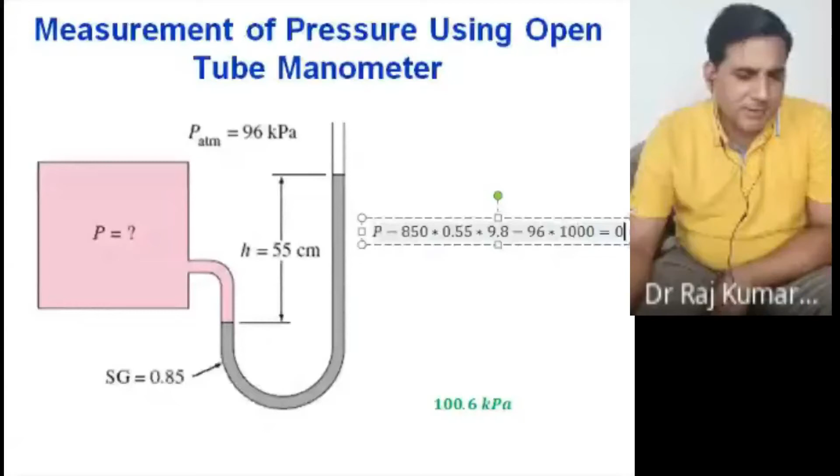So in last class we were solving something about manometer sensitivity. We talked about how the sensitivity of this manometer can be increased, in case of a small variation. So somehow you change the density of the fluid, or the design of the manometer, or some other means, so that you can measure that small delta H accurately.

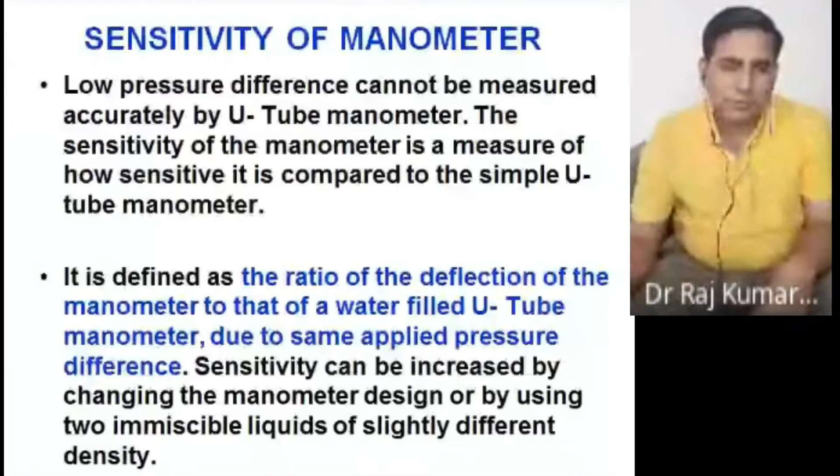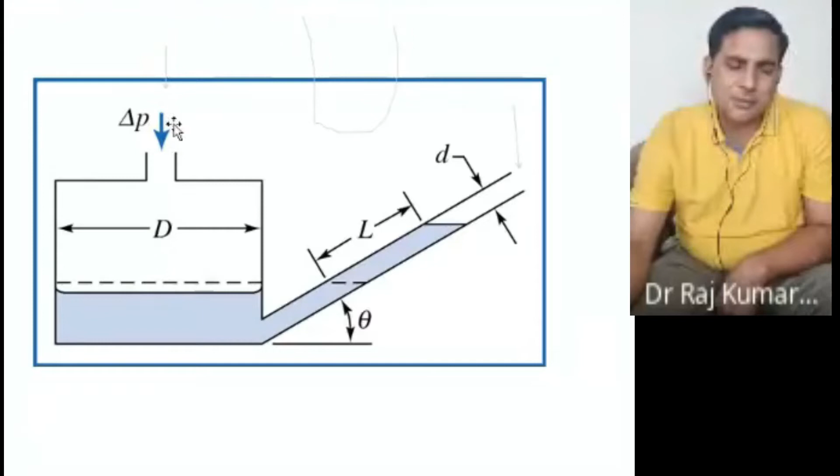What is the purpose of that? Once you connect these two ends into the manometer, you can see the difference. The primary level of the fluid in this particular limb was just at this point. Once you connect these two ends to a particular pipeline, you see the difference here - the meniscus has just a vertical change, this much. This you cannot measure by a simple U-tube manometer because it's of the order of just 1 millimeter.

This is just the order of a millimeter, so you cannot measure it much more precisely. But see the change on this side - can you see the change here? For this much of 1 millimeter vertical change, the inclined change is this much, much larger. So you can measure it much more precisely - this is L.

So this entire system is called the inclined tube manometer, because one of the tubes is inclined. Now this can be measured from here. So you are somehow increasing your measuring height or length, therefore your sensitivity of the manometer now gets increased or enhanced. Even if this is less than 1 millimeter, there would be a huge change in this L.

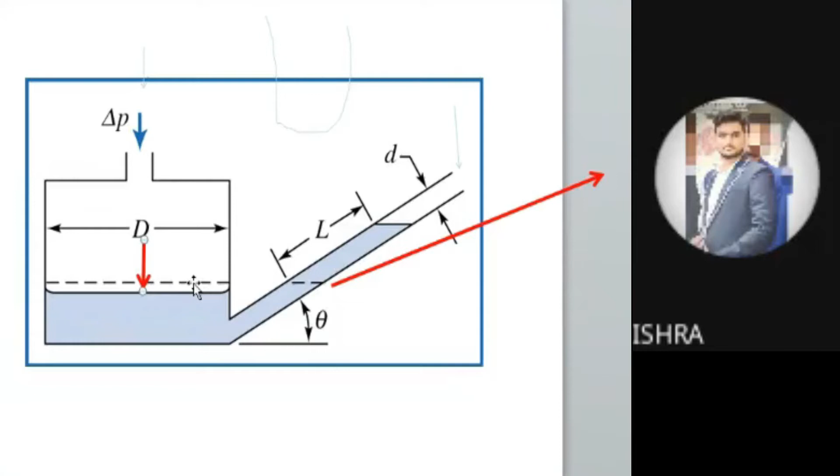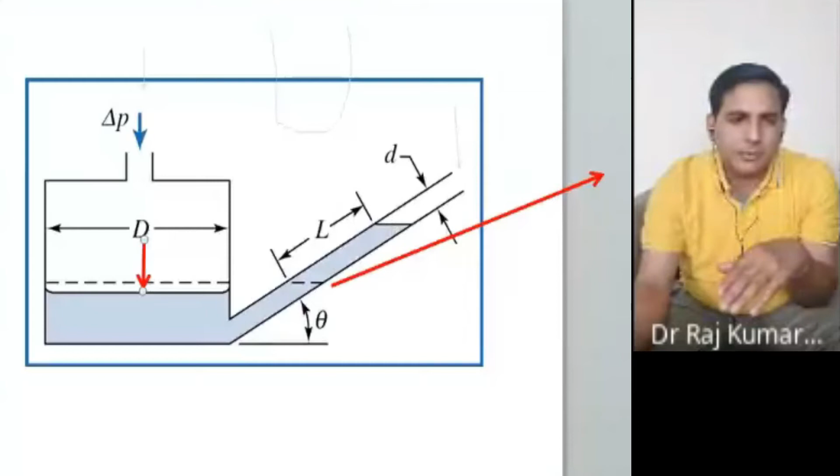That much has been changed, yes or no? Yes sir. So that much volume should go into this particular tube, because volume is the conserved quantity - mass is a conserved quantity. You are talking about the incompressible fluid, so whatever volume or mass is disturbed on this side, the same thing has to go to this inclined tube. So if you do this balance here.

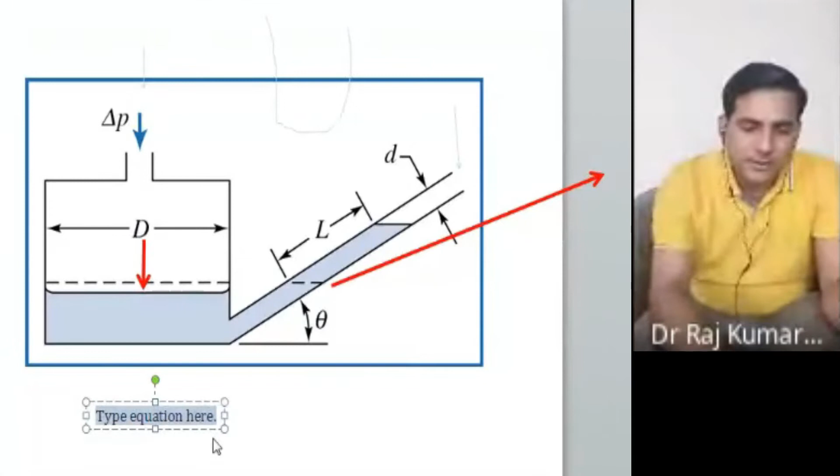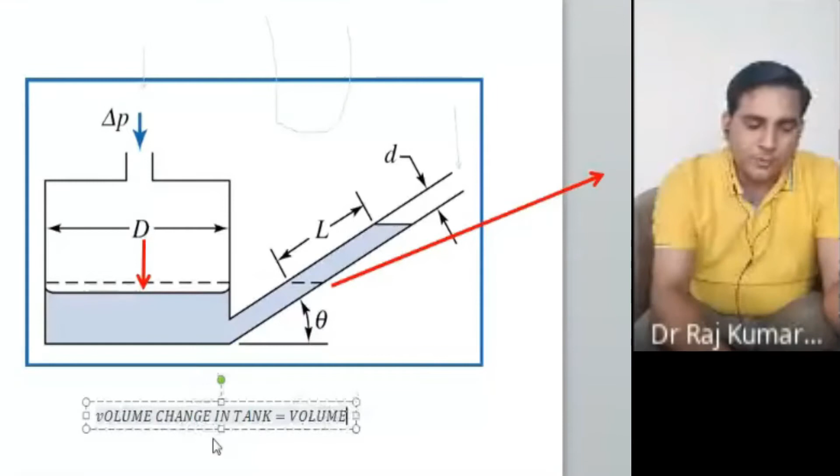So what would happen here once you pressurize it? You are decreasing the volume, so you can write that there is a volume change in tank would be equal to volume transferred to the inclined tube, right?

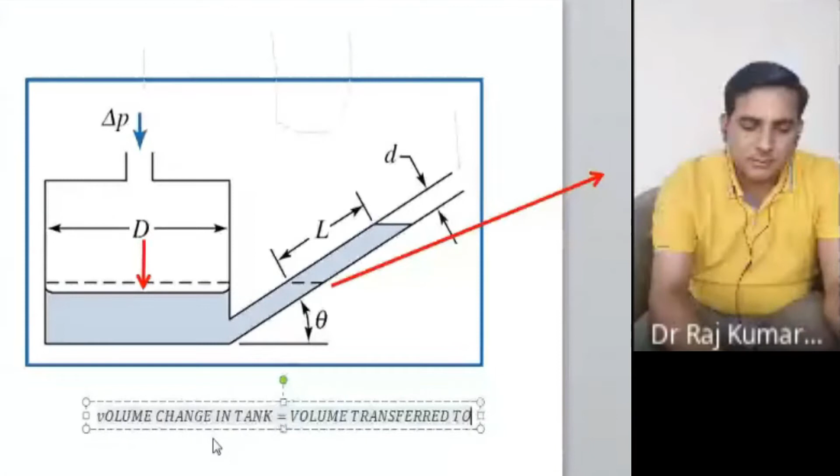Correct, yes sir. So that much volume, whatever volume is decreasing in the bigger tank, the same volume would go here, right?

Because this is the dash line, yes sir. This dash line, can you see the dash line? That line was this only - this is your dash line.

So this was your primary position when there was no pressure, because when nothing was connected, it was free, so left and right all fluid levels would remain the same. So initially you were here.

Now after you compress, this one has gone down this much, so there would be some volume change, and that volume is this much only, right? Fine.

Yes sir, yes sir. So that volume is this one. So you are doing the volume balance. Change in the volume in the bigger tank would be equal to gain in the volume of this tube here.

Now you can write the equation for that, in terms of volume. So if you write the equation in terms of volume here, so what will you write? The volume of the first tank would be what? It would be pi multiplied by D square.

So you have D to the power 2, divided by 4, multiplied by this delta h - which is just the small h here - would be equal to, on that side, again pi multiplied by d square by 4, small d square, multiplied by this L.

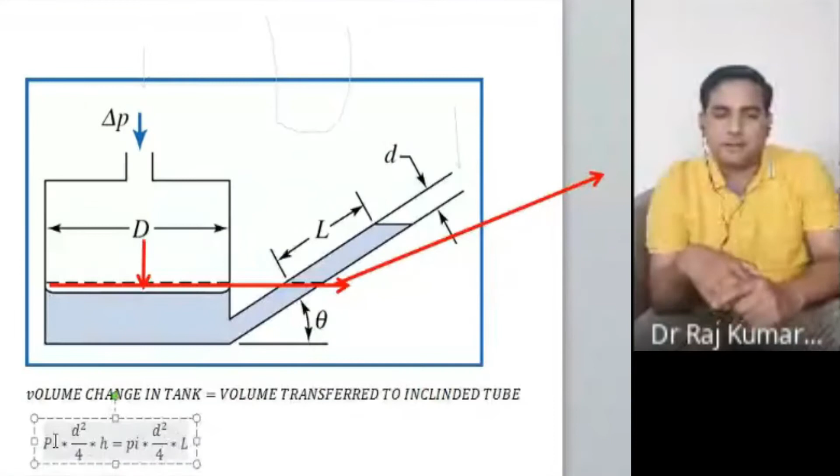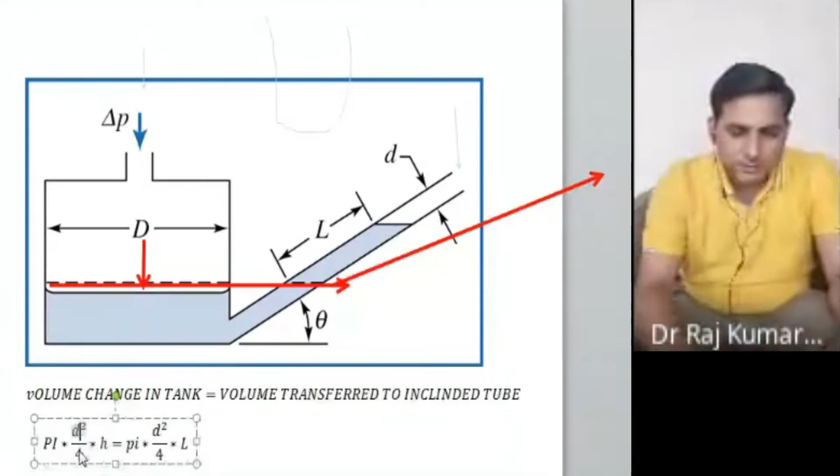Only, right? Correct or not? Sir, left side should be capital D. Yeah, left side is capital D, correct. So we can write it as capital D. Okay, so that is what - so now from here you got the relationship for L and H.

Yes or no? Yes sir. So what would come from here? So previously you have defined the sensitivity of the manometer as L divided by H, when we are taking water.

L divided by H - now only L divided by H. So L divided by H would come from here. What would come here? Capital D square upon small d square, right? That's what will come here.

But sir, now here H is not that. H is not what? Sir, you have told that if we want to calculate sensitivity, then we have to replace it with the H when we are taking water. We will come to that part also.

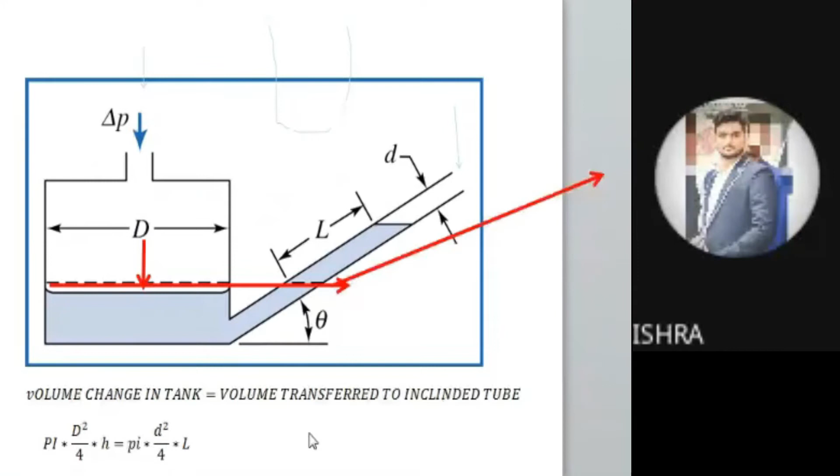Okay sir. So from here you will get H. H would be this small d square times L upon capital D square, right? So if you see at this particular point, just with the level picture here - so this much has been changed here, H1, and here for that, this particular change here is L, and L you can calculate in terms of vertical also. So if you calculate the vertical change here, that would be L sine theta.

Yes or no? Yes sir. Fine, now you are doing that - you are replacing it from the water manometer, right? Yes sir. To have the same pressure.

So what to do in that case? In case of water manometer, one you got from volume change.

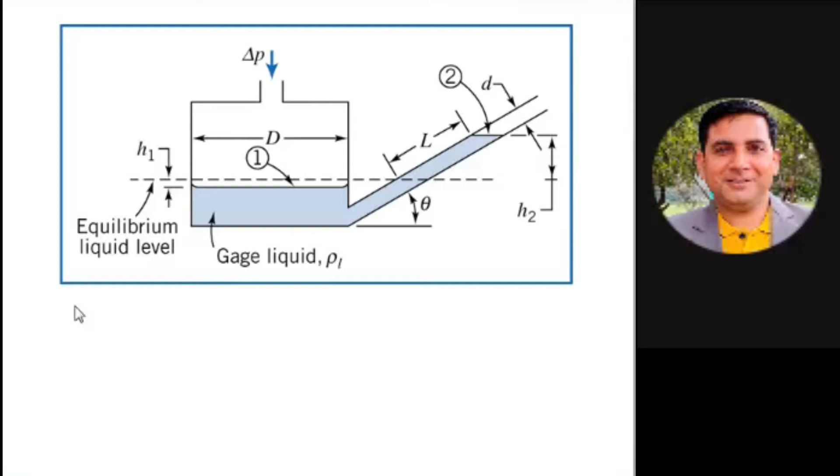Volume change से आपको H का equation मिला एक, right? You got just this one only, that your H equal to small h equal to small d square divided by capital D square, into L. That's what has come.

This is for H. Now let's see the pressure calculation here. अब pressure calculation तो कर सकते हैं. Can we do the pressure calculation? Pressure at this particular point and here. So how to do the pressure calculation for that? So delta P is equal to rho G H1 plus H2.

No, okay. Can we start the way which we follow? क्या फॉलो करते हैं हम? यहाँ पे प्रेशर कैलकुलेट करना है पॉइंट 1 पे, राइट? यस और नो? So you are taking, let's say, pressure at point 1 is P1, right? Correct? Minus,

because you are coming from here to here horizontally, no change. Now you want to see how much this value is, you are just coming from here to here. So let me draw this line. Just wait, because बाकी लोगों को भी समझ में आना चाहिए. So you are here, you have just come from here to here, right? So from here to here, no change.

After that you want to go up. कितना up जाएंगे? पहले this much, right? ये जो change है, right? H1 के बाद आप change जाएंगे this much, ये जो vertical change है, तब आप जाके यहाँ पे पहुंचेंगे, right? So this quantity, this length in terms of height is given as H2. This one is H1. So you can write now the pressure equation here.

So you have here rho 1. Rho is the density of the fluid. So you can write here rho 1, multiplied by G, and then after that multiplied by H. So H, अब H कितना हो? H1 plus H2. Have H1 plus this H2, right? Correct?

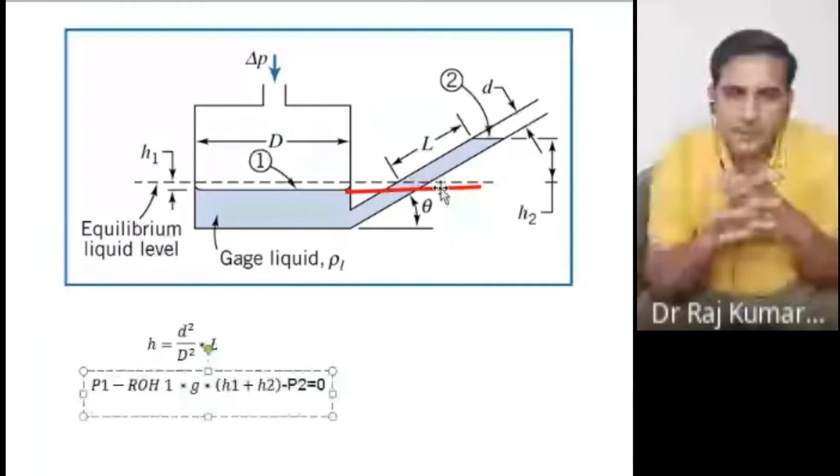And then the minus, after that you have minus of P2, and that you have reached to this point number 2, and therefore equal to 0. Is that fine?

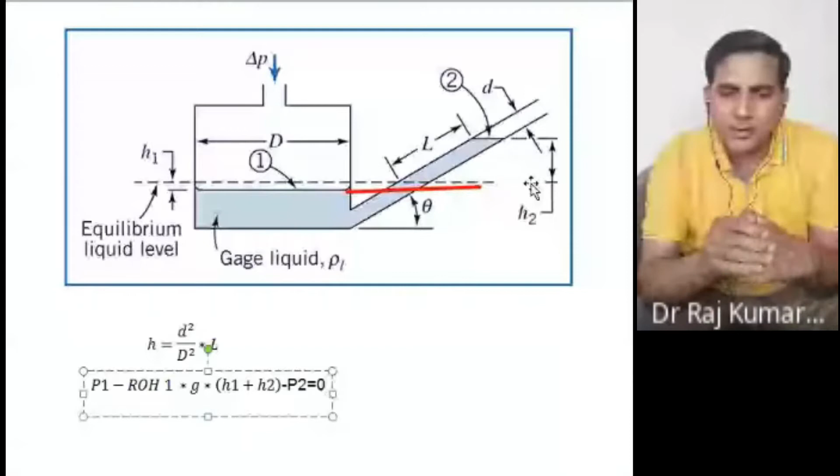Are H1 or H the same? जो मैंने यहाँ लिखा है इक्वेशन में, same, right? You can write this also as H1. So you can substitute this whole expression here at this particular place. This is your H1.

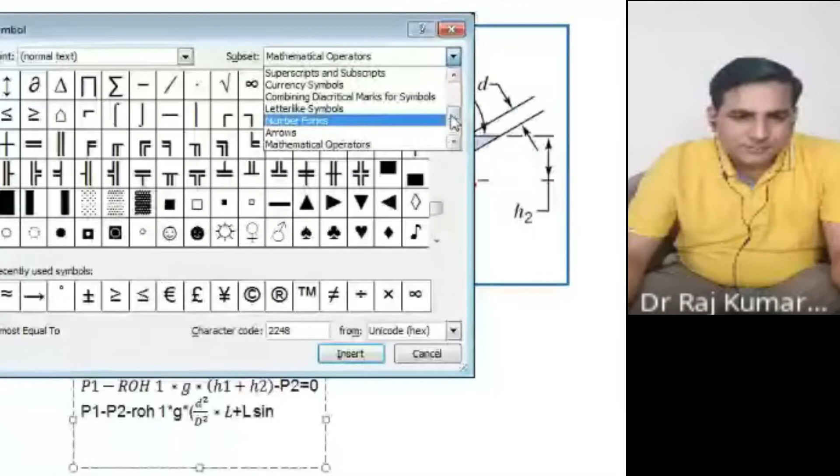What is your H2? L sin theta. So you can write here L, and then you can write the sign, and then you can substitute your theta, right? So somewhere the theta symbol will come. So you can write here that L sin theta. I can just write theta for the time being. Bracket close equal to again 0.

So can you get the expression now for P1 minus P2? What would be that? Delta P. So P1 minus P2 is delta P. So what would be the expression here, this whole thing? यही आएगा? Sir, तो we have to पूरा find.

आपका यहाँ just wait. ये पूरा कॉपी भी नहीं हो रहा है. कमाल की बात है.

Anyway, so this will come here, this rho, multiplied by this particular term total. So I am just putting dash dash here. This whole term would come. So this is your delta P has been measured by this particular inclined tube manometer.

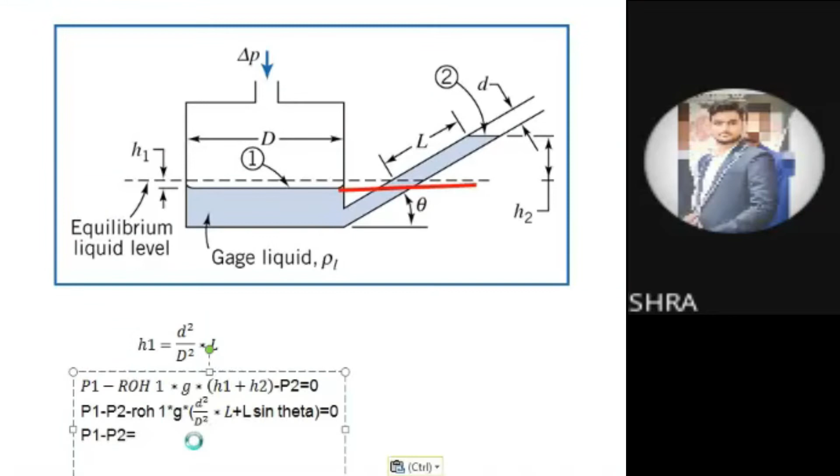Yes or no? Now same thing we want to measure it for water column. Water column से क्या करेंगे फिर? Same thing we want to measure it for water column. What to do for that? Sir, वहाँ पे P1 minus delta rho GH is plus P2 होगा. Delta P is equal to rho GH होगा खाली.

क्या कह रहे हैं जी? सर वहाँ पे एक हाइट होगी. डेल्टा P is equal to rho GH आएगा खाली, अगर वाटर कॉलम के लिए हम करेंगे. Okay, let's see. So you have this now. यहाँ तक तो ठीक है for this one. Now you want to calculate delta P with the help of water column actually.

So what to do for that? Water column. You have here this delta P. You want to write in terms of water. So water के लिए क्या लिखने वाले हैं? Rho of water, rho W, multiplied by G, multiplied by height of water, which we don't know. Height of water column we don't know because the water is not there in this particular cylinder, right? Yes or no?

Yes, sir, correct. Now from here these two pressures must be equal. You have one delta P, this is also your delta P. Both must be equated, both are the same pressure.

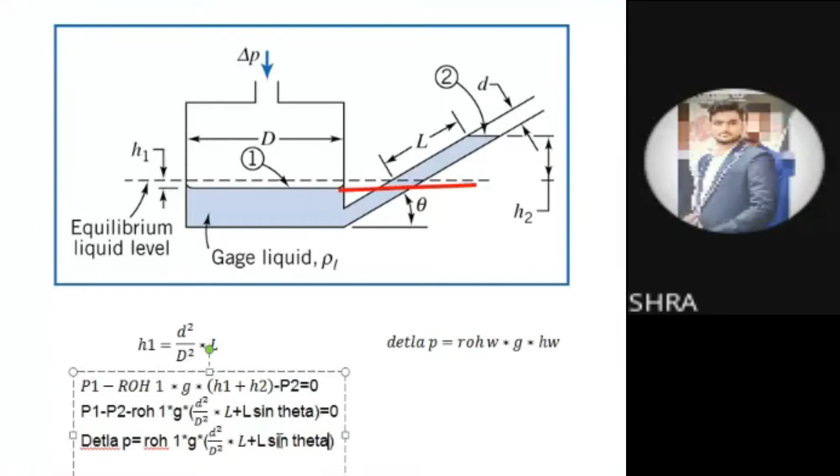So you equate them. After equating, what will come? If you'll do that, so if you equate that here, what will you get?

That you have this, and this you are balancing it by your rho of water multiplied by G multiplied by HW, right? Yes or no? So from here, what will you get, the equation

Yes, sir, correct. From here L would go, so this is the sensitivity of this particular inclined tube.

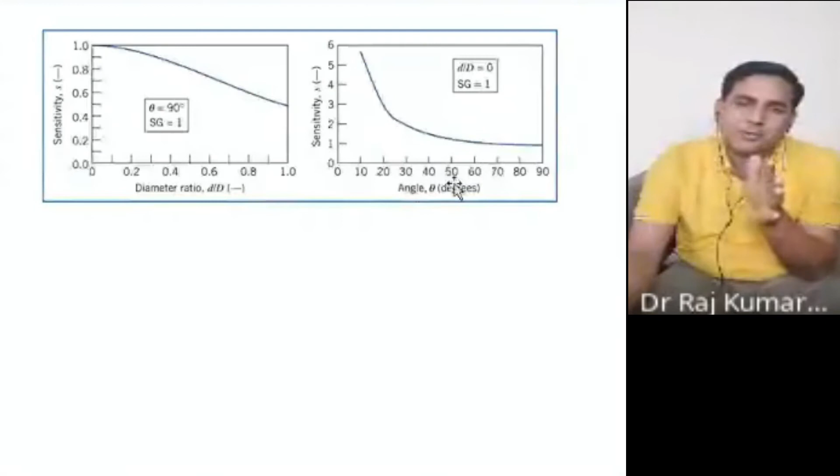In this case, you have just kept your diameter. D by D is constant here, so D by D being considered here is 0. Is 0 possible?

No, sir. Hello? No, sir. So something is wrong, right? And here the specific gravity is being considered 1. So what is it?

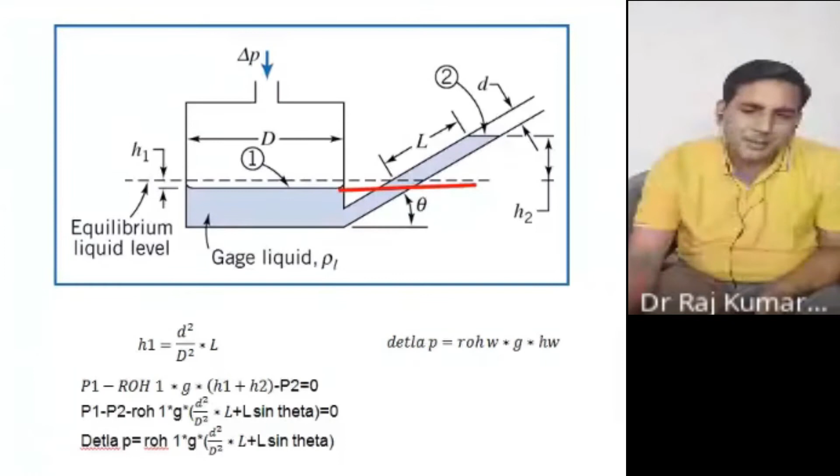Now they are just changing theta. You are just changing theta. This is how you are getting the sensitivity change here. So as your theta gets lower, your sensitivity is higher and higher.

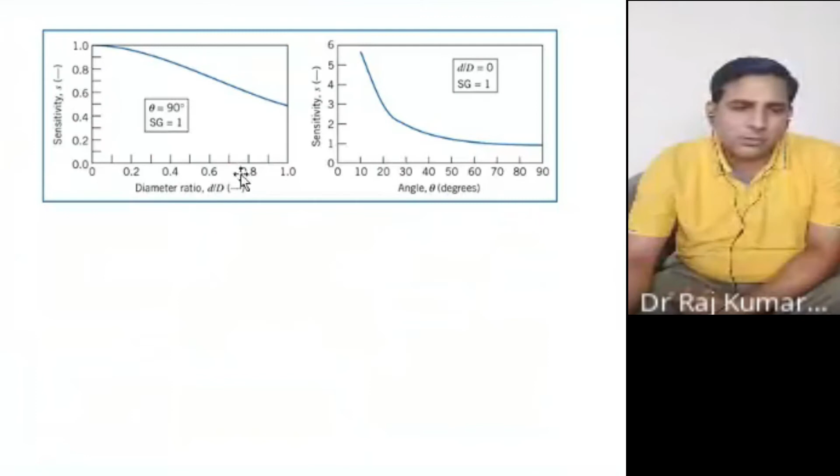Fine, so this is how we did the derivation of the sensitivity of the inclined manometer. I hope you people can do it.

No sir, you are not recalling it. You got it actually, you got it here actually. You are not paying attention yesterday, right?

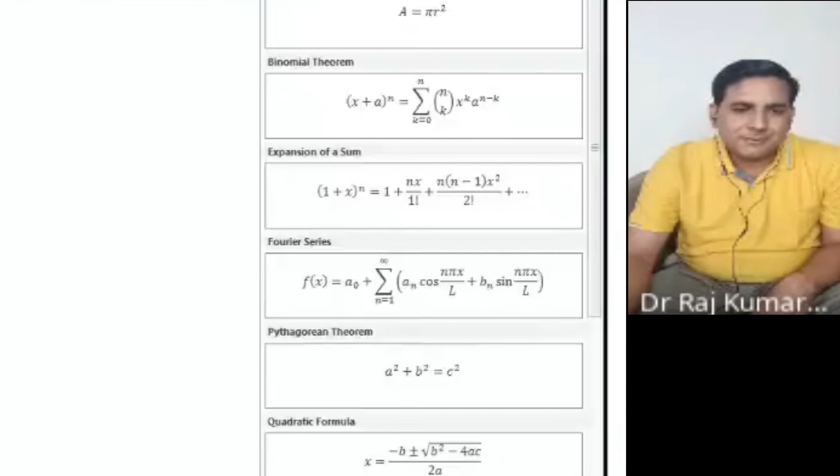So if you write here this, what did you do yesterday? Have you done something? Yesterday what did you do? You calculated a force, right? Differential force please. Rho, hello? GW sin theta L square by 2.

Yesterday you had derived a differential force, right? That you have taken by something, by rho, right? Density, you took. Yes sir, let me see if I get the densities. Because doing the equation typing is generally tough, that's why you have taken density.

You have taken G. And what else came from there? You got H something L square, by 2, square came, right? Yes sir, L square you got by 2 also. And you got what?

Width, anything into sin theta? Into sin theta, sir. Right, that's into what you got. And that also into the width of wall, D width, into W, width of the wall, right? That's what you got in the last class.

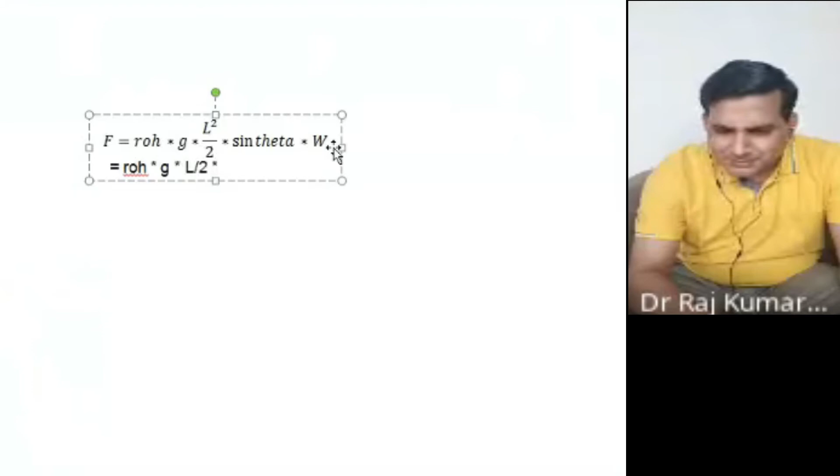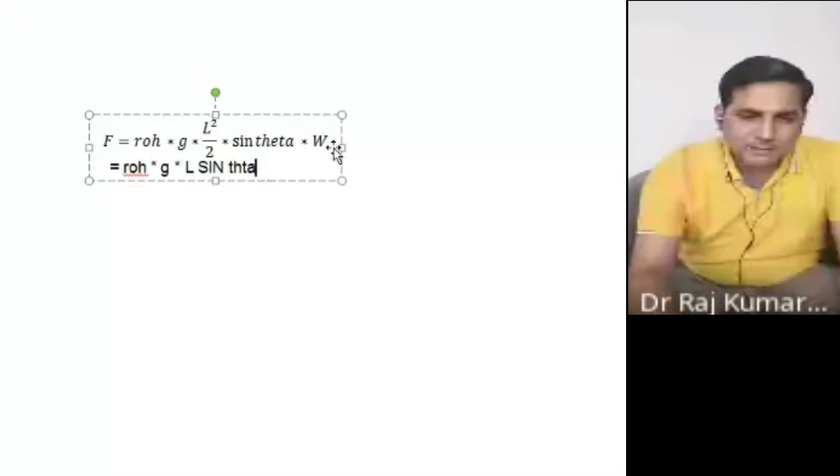Just rho multiplied by G, multiplied by, let's say, L by 2, and multiply by L by 2, then you can have, let's say, L sin theta, L sin theta, divided by 2, and multiply by L, multiply by W. Can we rewrite it in that form?

I think we can, right? We just interchanged it, we did that. Yes sir. Fine, so what is this L into W?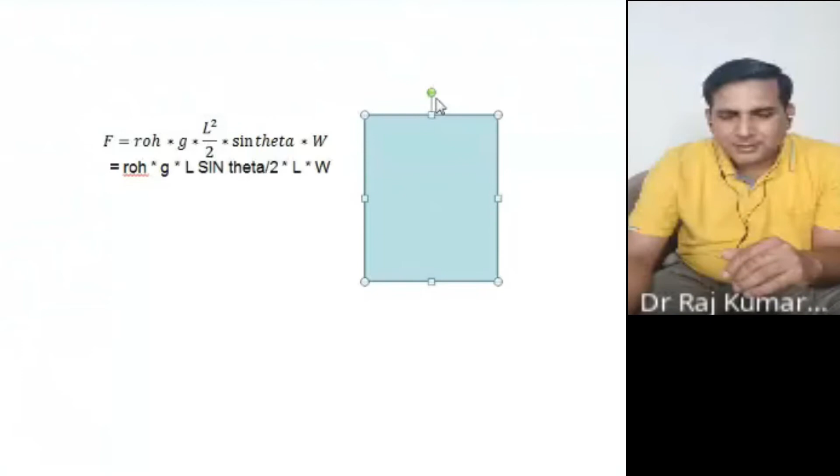Area, it will become area. If you want to draw this rectangle, something like that, and it's something of this. This is your vertical element.

This is your actually, you are changing, this is your L, and this is the width of the gate, right? Correct or not? In your case, it is this way, right? You are now calculating total force on the entire L. So this is your L, and then the width of that is just perpendicular to the side, the board actually. So you got the area.

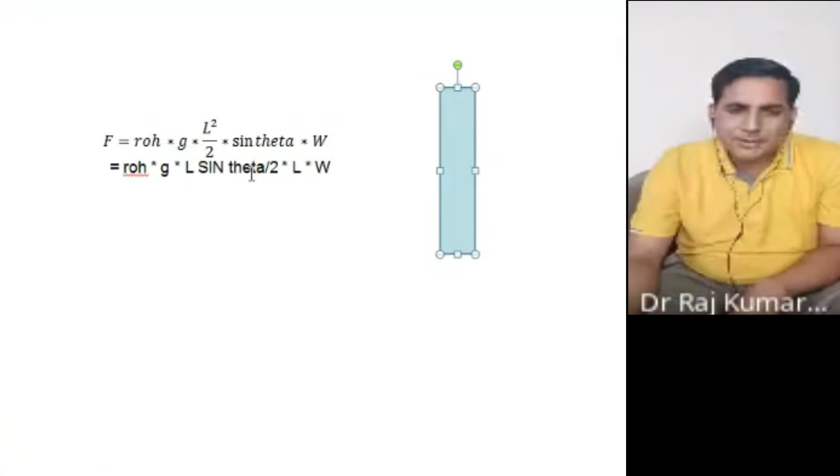Now what is this L sin theta? If this full is L, so for height... L sin theta will be like this height. L/2 sin theta is the centroid's vertical height, because this is L/2, so L/2 means you are here in the middle.

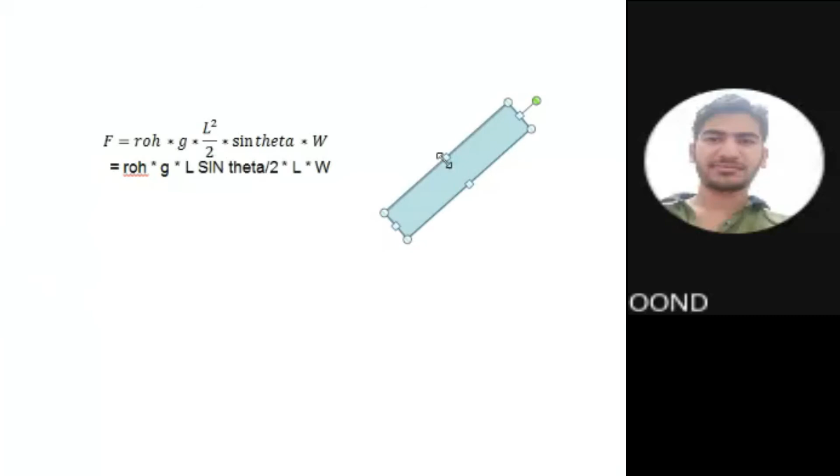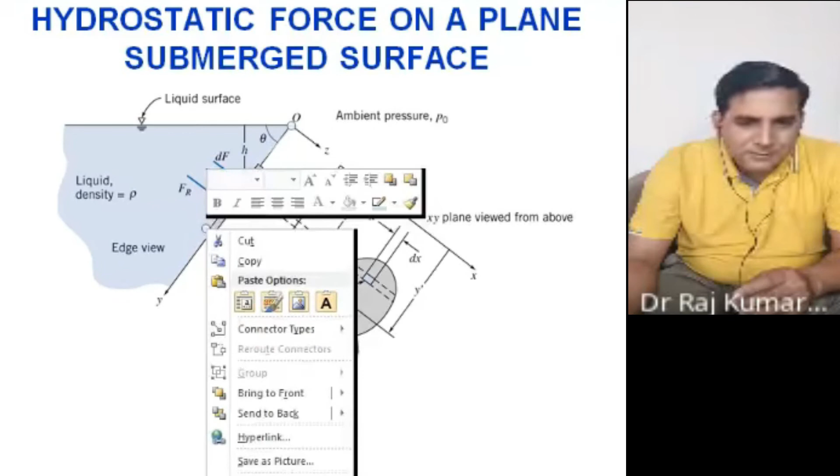And this is your free surface. If you see this picture, this L is only from here, let's say you are calculating L from here, this total is L from here, so let me just change the color. Where is my line? Can I fix the color permanently red here, so I need not go all the time doing that? So suppose this L is from here to here, this one.

So now the L/2 here, you are at mid. Mid means you are at the centroid of this particular block. And then you are calculating L/2 sine theta, meaning that much. How deep is the centroid from the free surface? That is called the pressure at the centroid. Meaning you are here at the midpoint. So you are calculating L/2 sine theta.

Practically you are calculating this height only. And this point is L/2 of the rectangle, in case of the rectangle, because you have this rectangle, something like that. So where will the rectangle's centroid sit? Just L/2.

Give some answer sir, because this is the most important part. So L/2 is the centroid here. If you want to calculate how much is this from the vertical coordinate base, it is L/2 sine theta.

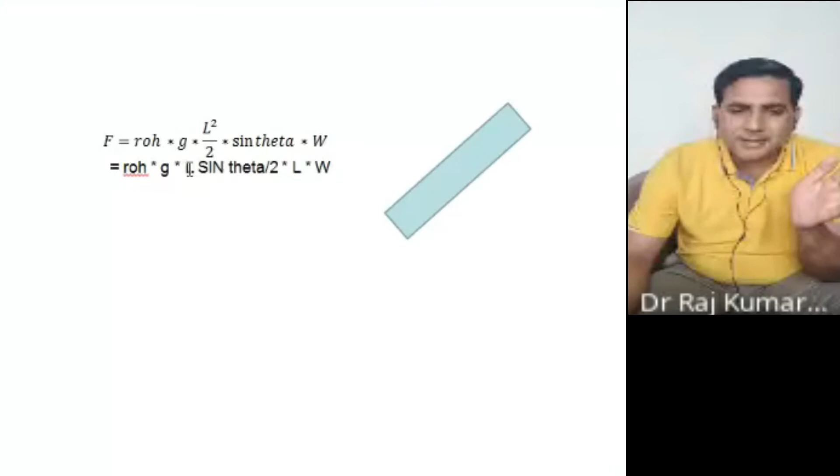That is the centroid coordinate from the free surface. So we can rewrite this particular formula again. Here you can write this rho, and what is this now? L/2 sine theta and all this.

So you are calculating rho into G into that is your YC, I will tell what YC is, into this area, L into W - now I have considered the area. What is this YC? YC is this L/2 sine theta, the vertical distance of the centroid of this from the free surface of the water.

Yes sir, it is the y coordinate of the centroid from the free surface, only from the free surface, not the bottom. That you should make sure. Now you can rewrite it further.

We will rewrite this again. So this term is called PC, this term is called PC into A. What is PC? We have given it a name, pressure at the centroid, because now the formula is rho G into YC, where YC is the centroid coordinate from the top surface. So this is just a simple formula of rho GH, right?

Yes or no? Yes sir. So in place of GH, H is now the YC, the centroid coordinate from the free surface. So this pressure is called pressure at the centroid, PC. We gave it the new name PC into A.

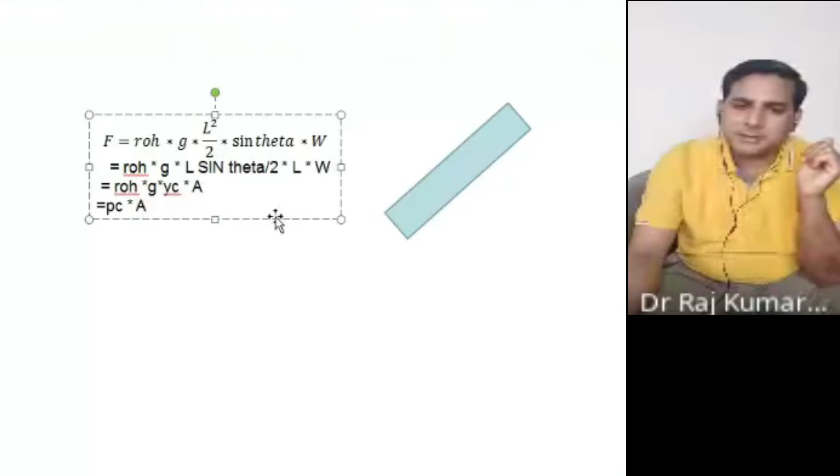Now the area of this particular gate remains the same. So this is not the projected area only on that particular side. Now here the area has come in - it is not this side, not this side, not this side. This is the area of this entire particular gate only.

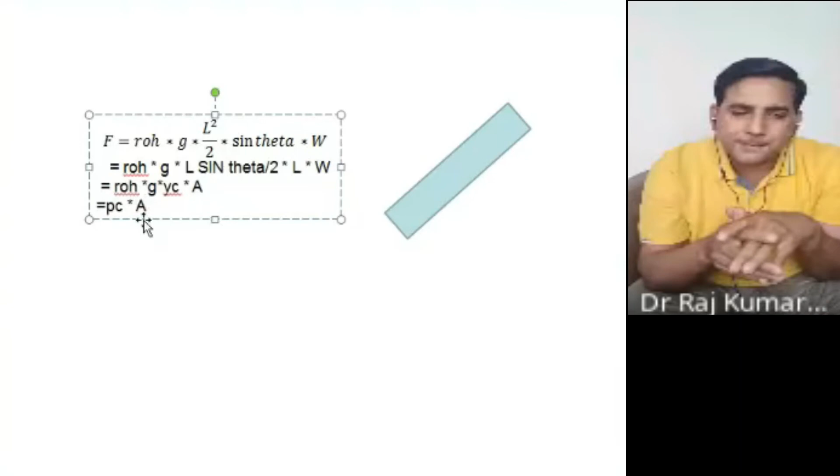Yes or no? Yes sir. So in that case you got this particular expression here. Now you can recall this one - this is what you got, the force PC into A, pressure at the centroid multiplied by area. Area is this one only.

Now here, what they did is they added P naught. P naught means, just say, if by chance you have some pressure here other than atmosphere, you can add that here, P naught. If the system is open to atmosphere, you can just make this equal to 0 in terms of gauge pressure, because once you add P naught here, you are just adding a pressure which could be present if it is not open to atmosphere.

Hello, yes sir. So this is what we have derived in this particular class and the last class also - that pressure at the centroid multiplied by area will give you the resultant force. Now what would be the direction of this particular force?

What would be the direction of this particular force? Perpendicular to the surface. That's what you have here - all the directions, all the arrows, are perpendicular only, right?

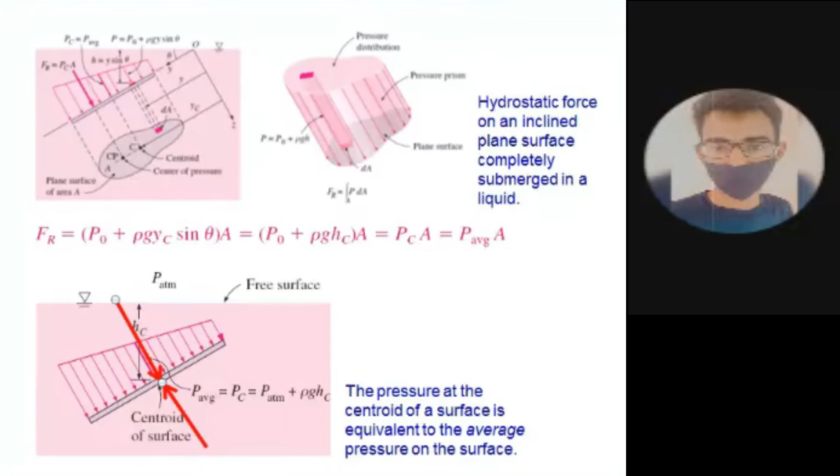Moment ka formula, can anyone tell? Force into perpendicular distance. Right, absolutely correct. So that's what we have here.

So first we want to calculate that where - pehle aapne force nikala, force ke liye kya kiya aapne? Pressure into area, Area, right or not?

Now pressure ka formula kya tha? What was the pressure? Can you see here why this y came? So this is the formula for force, pressure into area.

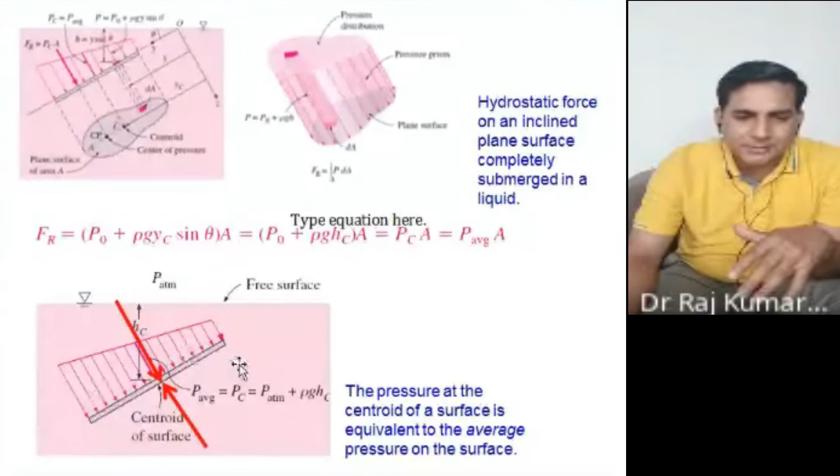Now this is the moment balance. If you have calculated the net force here, so this is your Fr. Let's say this is acting y dash distance far away from here. So this distance, from here to here, this much is just y dash, or you can see maybe this figure. Let me see.

Here you have here, so this is the point here in this particular picture, where we have considered that net force would act at this particular cross point, that is the Fr. Now this point is y dash distance far away from this point O. This point O is there. So this coordinate is being measured from here, y dash.

So this is what we have calculated. The net force is acting at this point. This is y dash distance far away from point O. So the moment of this force would be what? Fr into y dash.

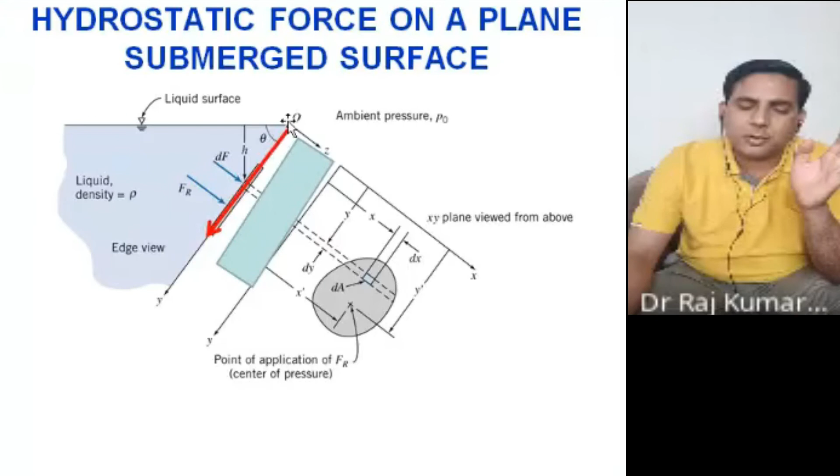Yes or no? Yes sir. Now this moment should be balanced by the moment provided by all forces from here to here. Now you see this particular figure. At this particular point, force is this much, here is this much, here is this much. So if you want to calculate the moment of this force, if you know the force at this particular point, multiply by this y, yes or no?

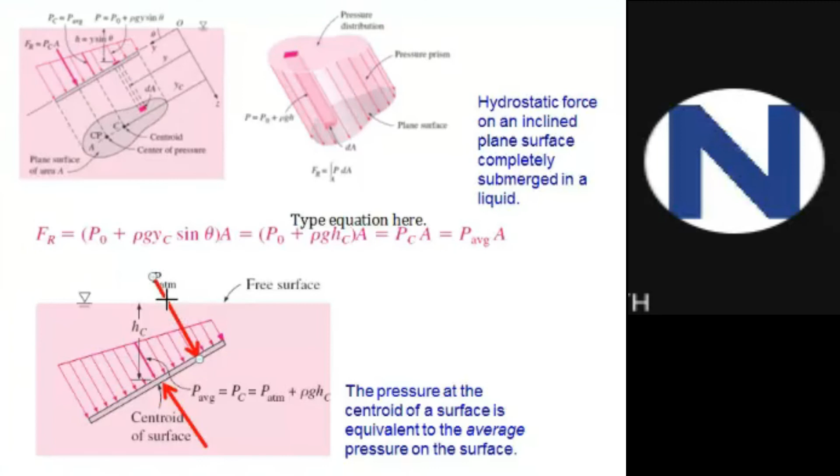Let's say this one. So this is what you have. So somehow if you know the force at this particular point, multiply by this y, will give you the moment of this force here. Yes or no? Yes sir.

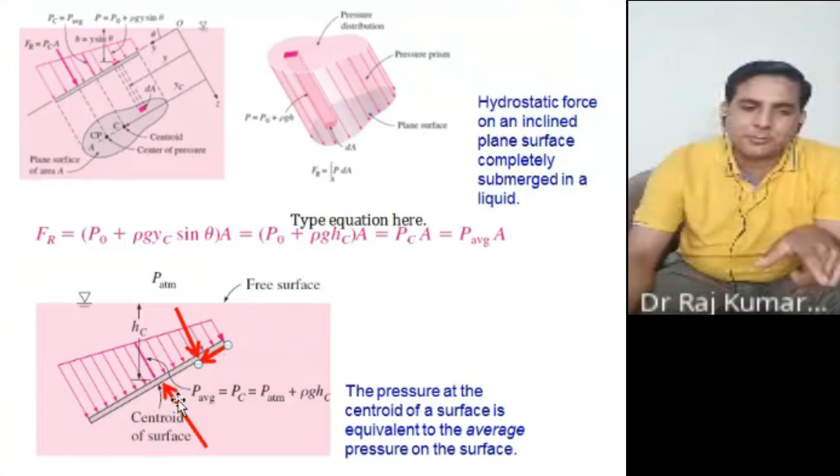So if I calculate the moment of all forces about this point, the total of this should be balanced by the moment provided by this force. Yes sir, yes no? So that's what is being done here. So this is the moment provided by the resultant force, y dash into Fr. It is being integrated for all individual forces provided on that particular plate.

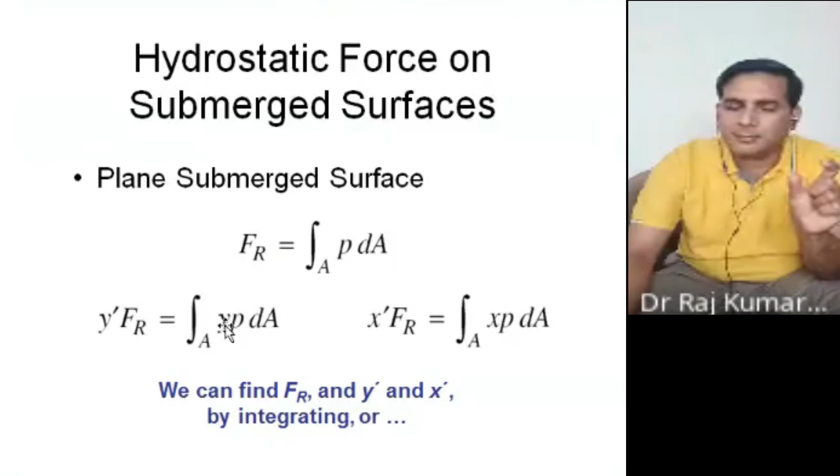So this you have, that P is the point where those forces would act. So this P into A is the force which you already have. You are just multiplying by Y, because that force will act at Y distance away from point O. Yes or no?

Yes sir. Now how to calculate here? This is what you have. Yeh aapka pressure formula tha. You have calculated force in this.

You have calculated P naught into that, the moment of this y into dA. So that you got the formula there, yc into A. So first the moment of this calculation we did already, right? This much we did, force calculation.

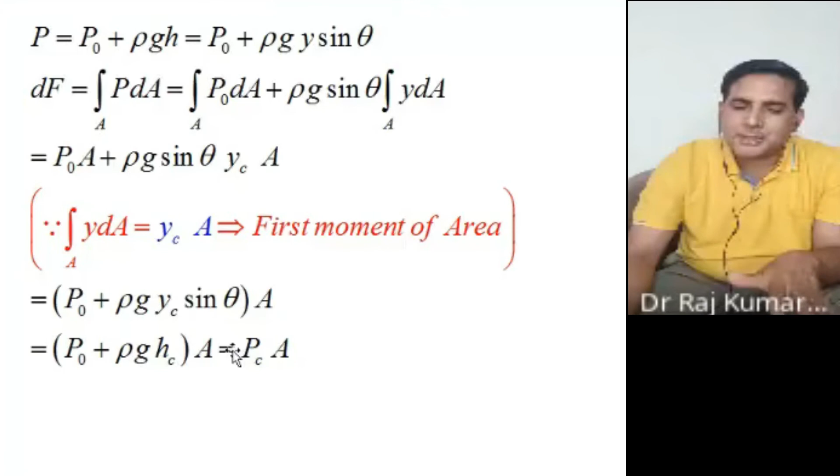Yes sir, right? Now we want to calculate the moment of this about this point O. You have y into P into dA. This is the pressure, P into dA, multiplied by the pressure point. Where does it act from y coordinate?

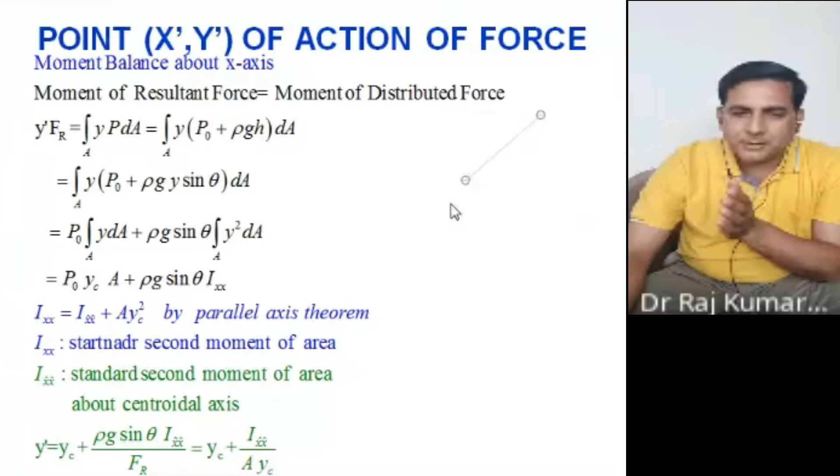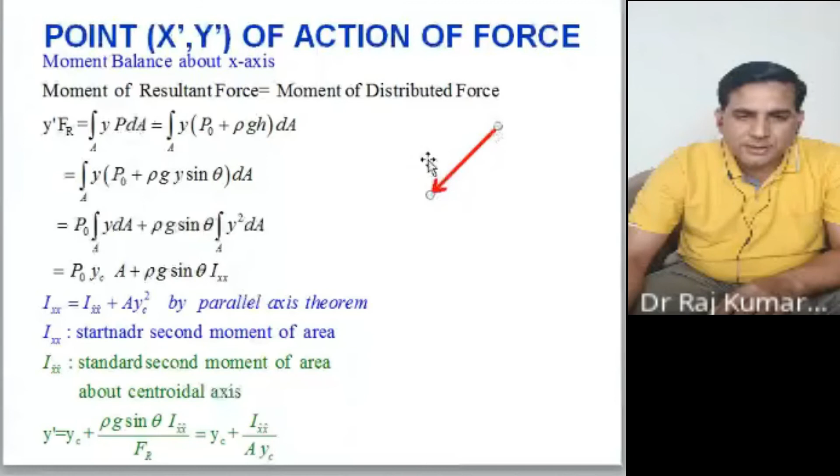So this is your coordinate here. Let's say this one, I can draw here. So it's something like that. So you have calculated this force at this particular point, which is at distance y. So you have calculated the moment of this, y into P into dA.

Now you are substituting the value of P. P kya hoga? If you have P naught - yadi aapka top pe kuch pressure hai, so you can add that P naught. If not, if it is not there, atmosphere, just cancel it out. So P naught would become 0. Generally, you can take it because it may or may not be present. This is the rho gh. Rho gh is the vertical height of this point. So this point ko yadi aap vertical karenge, toh this is your h. So that is your rho gh, because this vertical height of the fluid can also give the pressure.

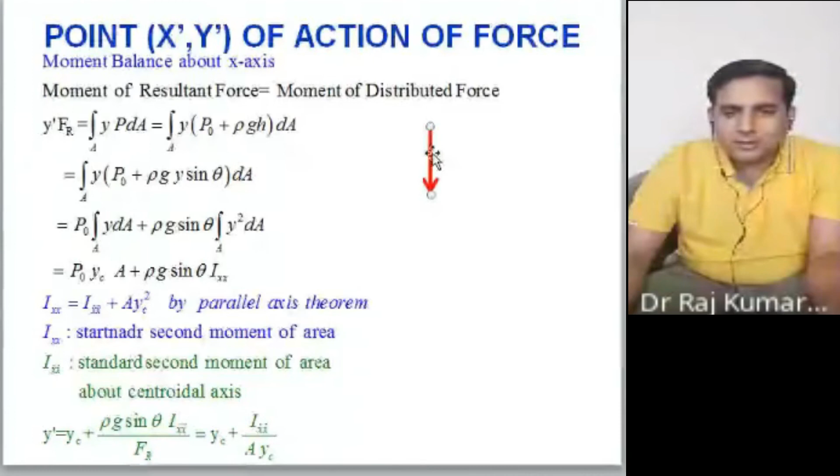Fine. Hello. Give response.

So this is what you have now. Now the h is what? This was y, and this one is theta here. So this is y sine theta. So at the place of y, h here you have substituted y sine theta.

Now you have to integrate. You can do the integration of that. So you got this one: P naught y into dA, rho g sine theta y square dA. If you know the value of y, integrate it here, all finish.

If you know these, there are some other alternative ways to calculate here. This y into dA is called first moment of area. Y into dA is first moment of area. Y square dA is the second moment of area.

So that's what you wrote in this particular formula here, yc into A. So if you know the coordinate of the centroid multiplied by A, it would give you the first moment of the area also. And this is Ixx, called the second moment of the area. So in some figures it's complicated, so for some well-known figures, these values are known to you for a large number of figures of shapes and sizes.

So now you can just calculate from here the expression for y dash. Expression for y dash would be yc, rho g sine theta, Ixx, divided by FR. So sometimes you know the value of Ixx, you can directly substitute it; you know the value of Yc, you can directly calculate the point of action of force without much integration.

Integration will always work. It will always give you 100% correct answer because here you need not to memorize anything. But in this last formula you have to memorize how many things? One is Yc for a particular figure, the other is Ixx. So if you know them, directly substitute here, you will get the answer. If you don't know anything, if you have confusion about what the Ixx is, what the Yc is, you should use this formulation only. Simple.

Here there's no problem at all. In this particular formula, this is the simplest one. You are just adding here. Pressure formula is rho gh, yes or no?

Yes sir, multiply by dA. dA is just dx into dy, yes or no? If the width of the gate is constant, so dx is all the time your width of the gate. Then w, so only variable is y. You write h in terms of y as y sin theta. Simple, after that you have to integrate it.

So for this you need not remember anything. It's a simple standard formula which you already know. Only thing you are doing is the moment balance. But for this formula you have to remember things, but it will give you the answer in one line if you know the values correctly, otherwise you will get zero. No intermediate marks would be given for this formula, because you are not doing anything.

Here you are doing the integration and everything. Somewhere if you went wrong, your answer will come, still you will get marks for that because you have done some working procedure for that. Question is the same, yes or no?

So if you are solving some objective type question paper, most of the time it's advisable to go for this formula because it will take lesser time. But you should remember these values correctly, otherwise you will end up with a wrong answer.

This may take 3 lines. How many lines did it take here? 1, 2, 3, yes or no? Just 3 lines. Now you see how much time it will take you in 3 lines for all this.

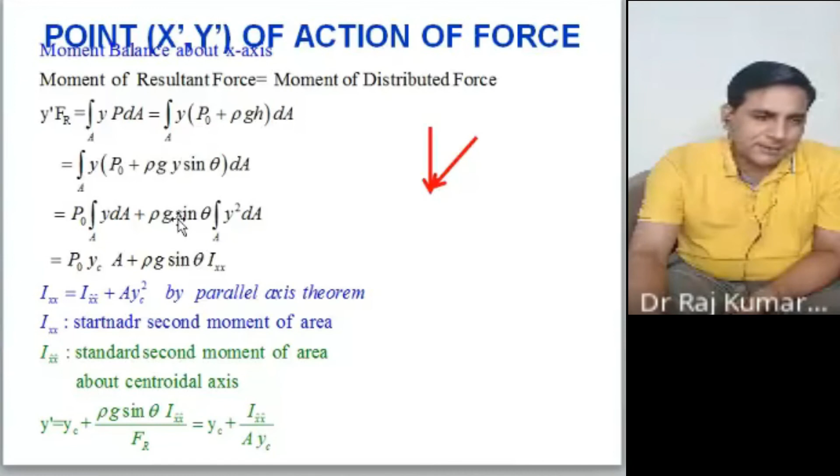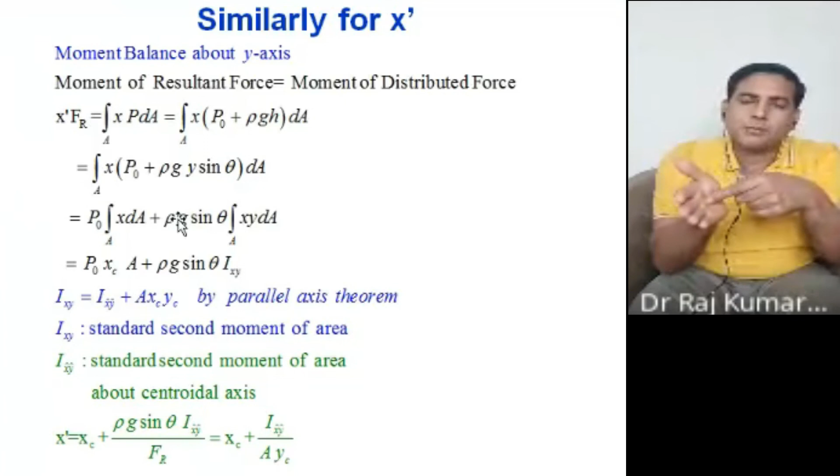So we will end up at this particular place, and then in the next class we will calculate the x coordinate here. Right now we have calculated the y coordinate. The same way we can calculate the x coordinate - how much far away on this side. Because to locate a force, we know the coordinate from this side, we know the coordinate from this. Only then can we locate a particular point, right?